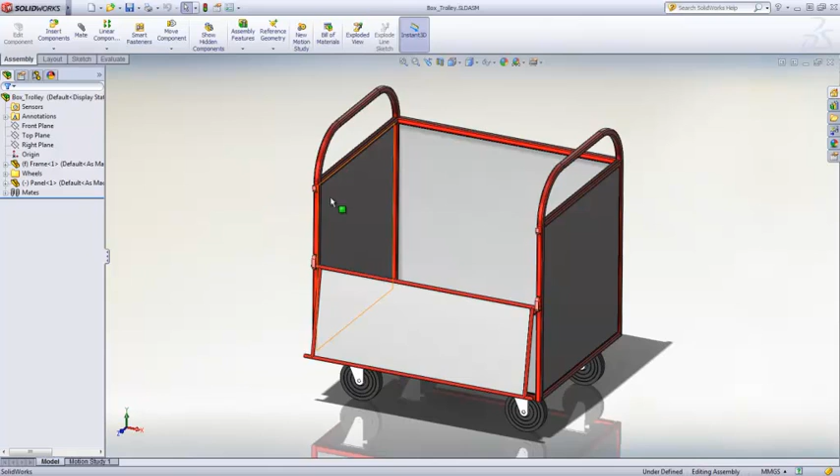There are many scenarios where creating a design as a multi-body part makes more sense than creating an assembly. A welded frame with sheet metal panel, such as this box trolley, is one of them. This is pretty typical of a welded design, with structural members for the main structure, gussets, and sheet metal panel on the side and the bottom.

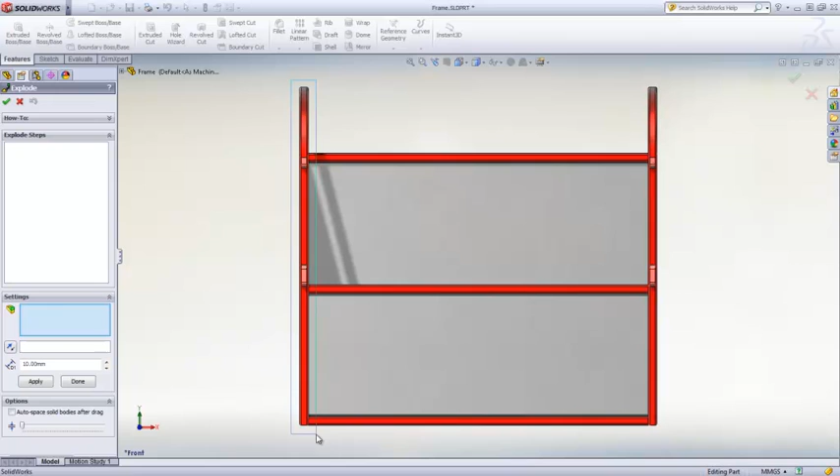SOLIDWORKS 2012 now makes it even easier to detail your multi-body designs ready for manufacturing. Exploded views can now be created to detail the relationship between components, how they should be welded together, and in what order. The process is almost identical to creating an exploded assembly.

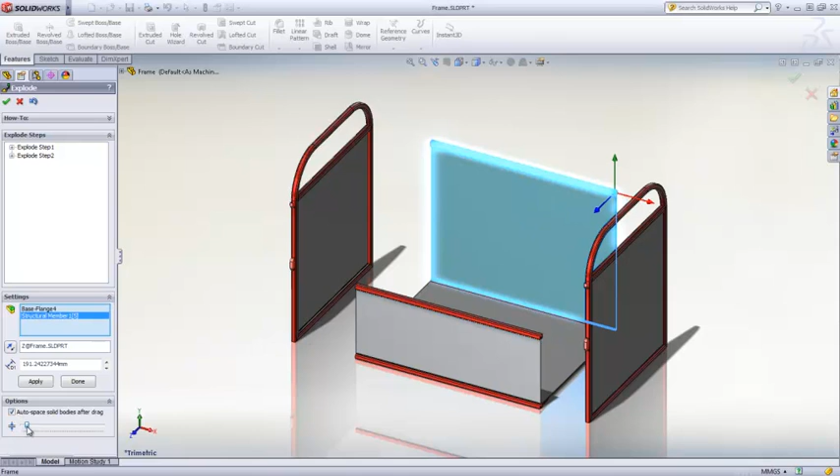All you need to do is to select the bodies to be moved. You can, of course, select multiple bodies for each step. The triad makes it easy to define the explode distance and direction and simply drag the bodies on screen. As in assemblies, you can create one or more explode steps, evenly spaced exploded stacks of bodies, or edit previous steps to include a new body.

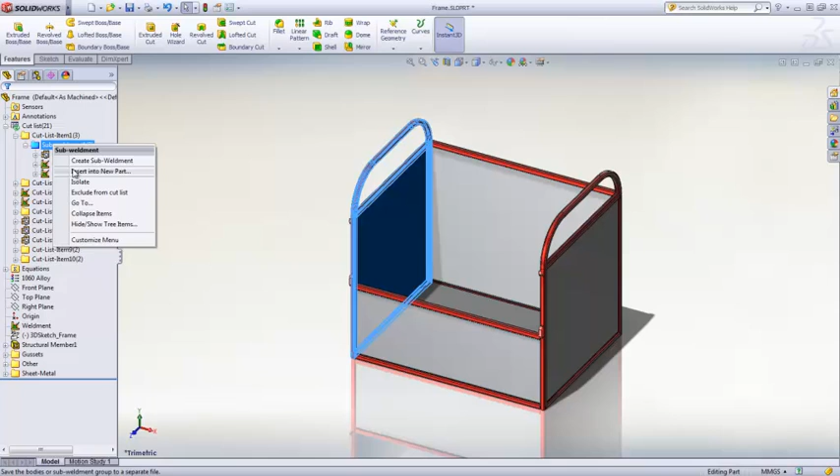If you prefer to manufacture your design as a series of sub-weldments, SOLIDWORKS 2012 has some significant enhancements here too. Just like with any other body, a sub-weldment can be inserted into a new part to make it easier to detail or to use it as a starting point for a new design.

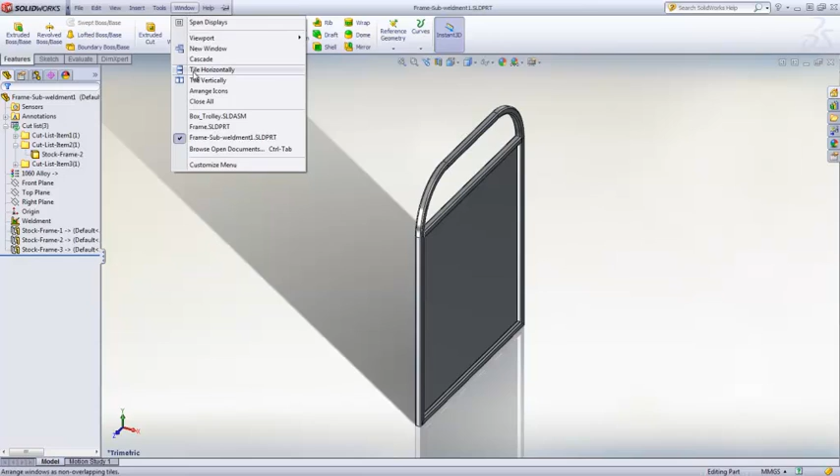The cut-list properties defined in the original design are now transferred from the sub-weldment into the derived part and remain associative as long as the parts are linked together. This is clearly indicated in the cut-list properties dialog box to avoid any confusion. Any new property created, edited, or deleted in the parent part will be reflected in the derived part.

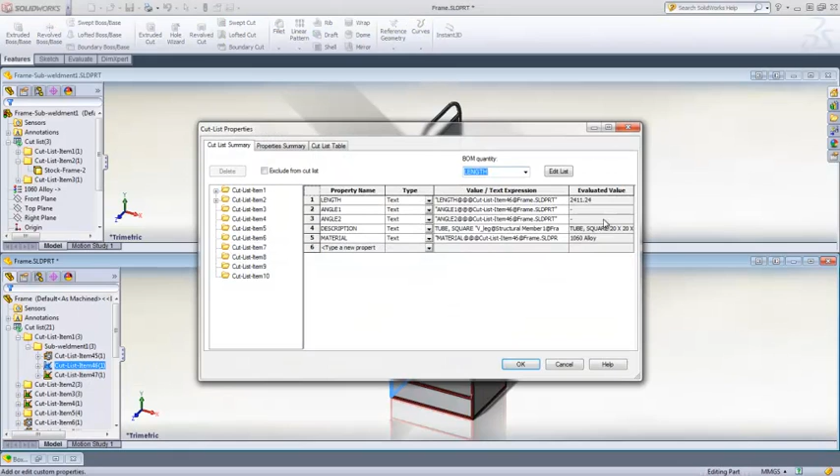This applies to both sheet metal bodies and weldment bodies, so you can detail your sub-weldments and be confident that the information in the cut-list is accurate and up-to-date. After the design change, we can see the cut-list has updated automatically. Switching over to the derived part, we see that not only is the geometry updated, but also the properties are up to date as well.

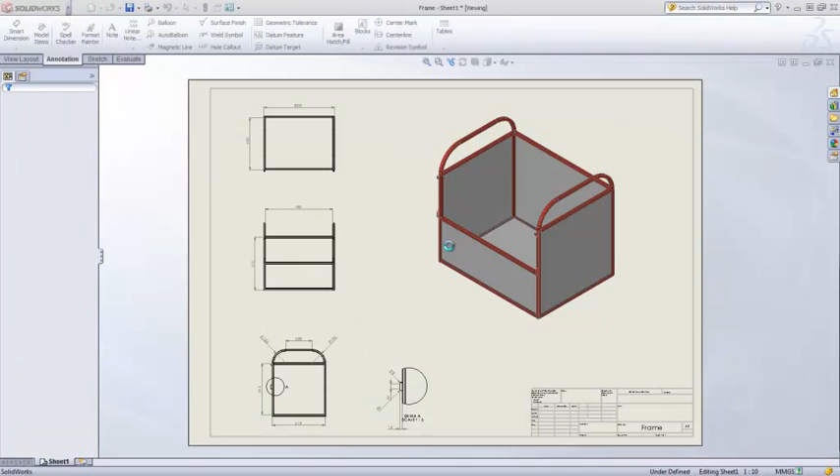Finally, exploded views for multi-body parts are also supported in drawings. Just like an assembly, exploded views can be dragged onto the sheet from the view palette, or simply toggled with the Explode View switch in the Property Manager or right mouse button menu.

SOLIDWORKS 2012 enables you to create and detail multi-body parts with as much speed and flexibility as assemblies, but with all the added benefits of multi-body modeling.